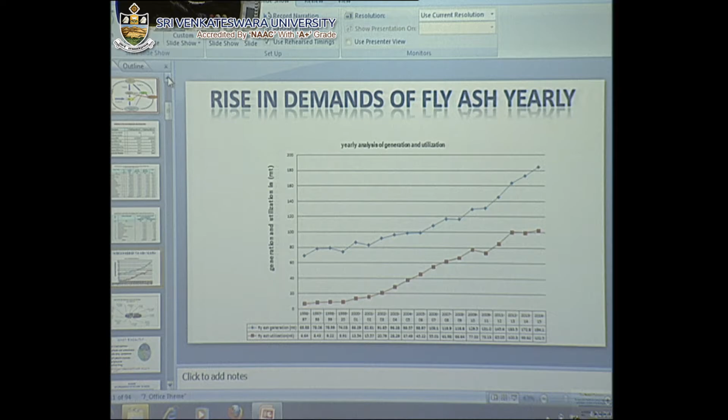Okay. So if you see, India is going to be more than 150 million tons per year, where China is second. If you see, the utilization is only nearly 40%. So this 60% unutilized fly ash is going into our environment, soil, health, and many more. So how can we turn this waste material into a useful material?

The challenge. The government has given a strategy, a fly ash mission, to fund different research projects. They have made a partnership with Russia also. Even so, India's fly ash utilization is very low, and still this has become a fly ash pond. Some fly ash, due to the rain, comes into the water, and again the soil is going to be destroyed.

So this is the major problem for the environment sector and agriculture. As well, if you see, the industry made a rule that near a thermal power plant, within 300 kilometers, you have to use the fly ash, because transportation of fly ash is a big problem. So to reduce the cost, it is made compulsory to have bricks made of fly ash, so that they can be used in construction. Roads also can use it, but still I can say we are far from the utilization of fly ash.

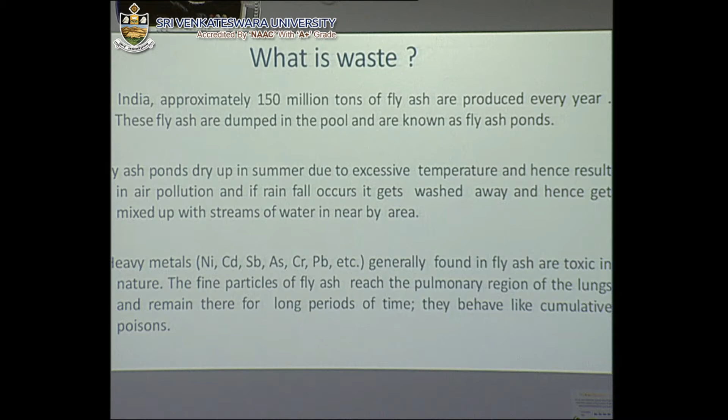So I am going to give a scope to the research scholars as well as the scientists on how we can mitigate or how we can use fly ash more and more, so that this fly ash waste material becomes a useful product for humankind.

How much time, madam? Okay. So okay. So this I am skipping.

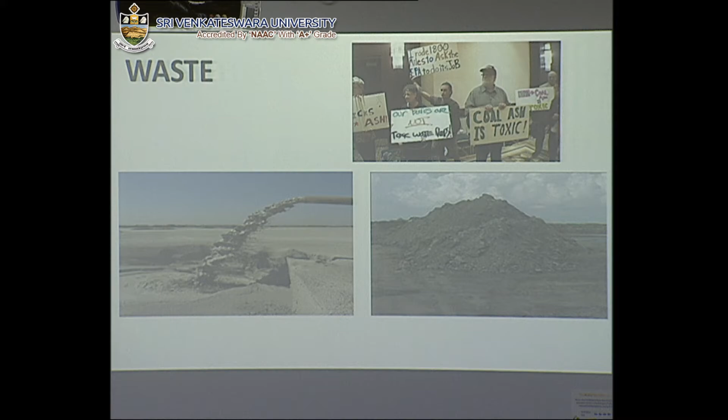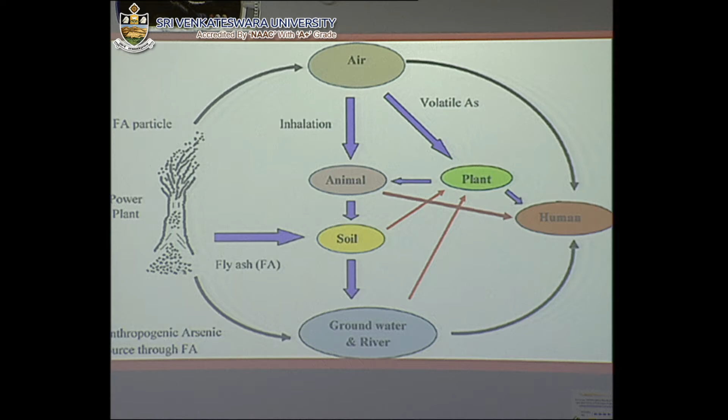No problem. So you see, this is basically the fly ash, we have the pond. I am going to skip those things. This is one summarized figure. So here we have the power plant. The fly ash particles come here and go into the air, and this is because of hazardous material like cadmium, all these particles. So this is going to be inhaled, and this is a problem for health.

Then also the animals, the soil, groundwater is going to be contaminated, soil is going to be contaminated, plants also, and overall this is going to affect humans. So this is the cycle of how it becomes unwanted. How can we use the material? Because we cannot stop the growth of India or the world by stopping power plants. If power plants are stopped, we cannot get energy. So we require energy from thermal plants.

At the same time, the coal quality. So we are getting more ash from the coal. So India is also importing coal from outside because it has less ash content, even though ash is a major part of Indian thermal plants. So if you see the generation, this is basically the data.

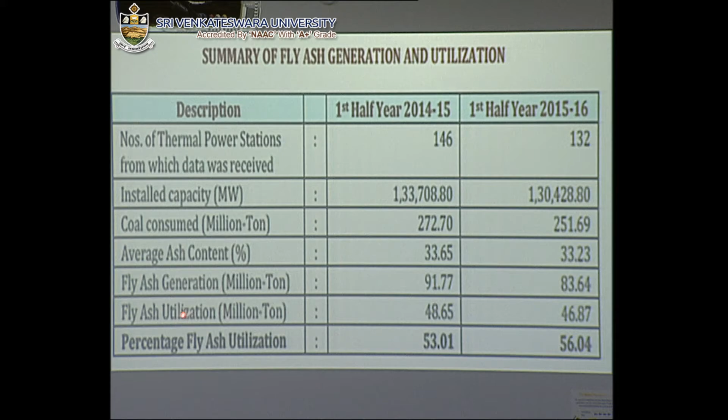Overall number of thermal power plants, 146 here, 132 here, and the coal consumption, you see, 272 here, 251 here, and fly ash utilization you see here 48.65, here 46.87, and overall the fly ash utilization is still 53% only.

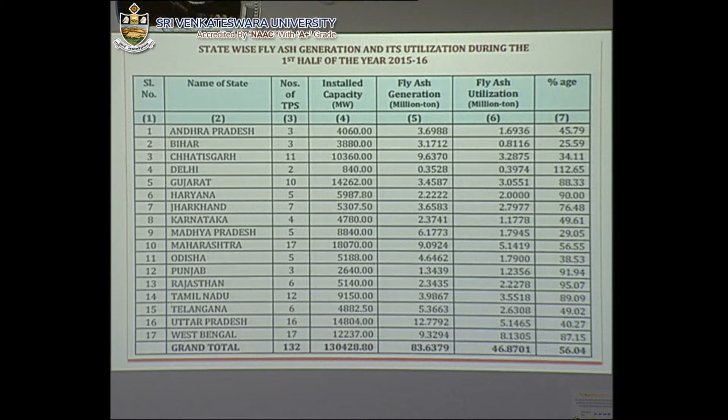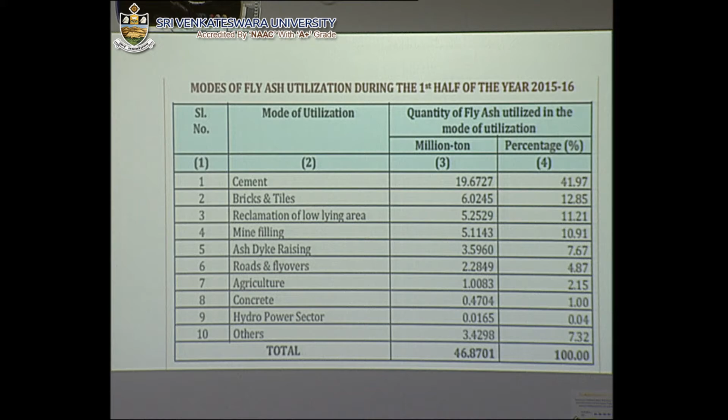The major utilization of this is in cement, brick and tiles, mine, ash dyke, roads, agriculture, concrete. But if you see, this utilization is insignificant, so we have to find a new kind of product. This shows how we are going to use this fly ash. This is basically the Central Electricity Authority data, published in 2016, and this clearly shows that we still have not fully utilized the fly ash.

So I am going to give you some glimpse of what we are working on with fly ash. Typically, use of fly ash in cement is nearly 44%. I am going to skip these things. If you see the data here, the generation is in blue color, and this is what we are utilizing. So we are far behind in the utilization of fly ash.

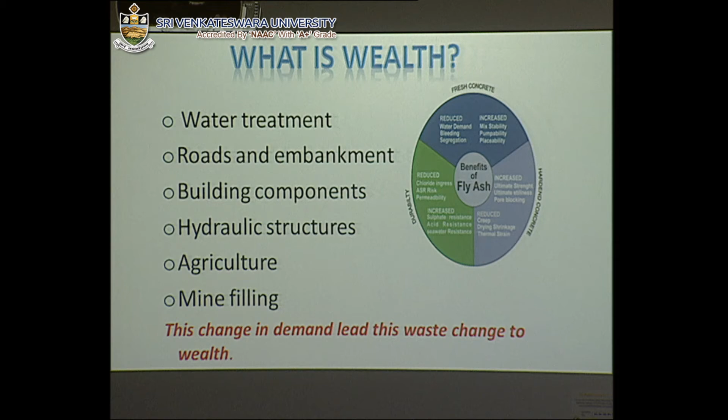So in this photograph you can see cement is 41.97% because we have construction, and in cement earlier we were using ordinary Portland cement; now they are putting in fly ash. So cement is the maximum utilization of fly ash, but still we are not able to cover 100%. So how can we use more and more fly ash?

I think the DST and other government departments are ready to pay for any product, tiles or any other things, if you can use the fly ash, because fly ash has no cost and plenty is available. Or how you can convert a fly ash pond to agriculture, because people are doing some research on agriculture, but agriculture is still a challenge. We are not able to grow food varieties. People have used it only for greenery purposes, but it is not coming as an agricultural product. So you can clearly see utilization is very less.

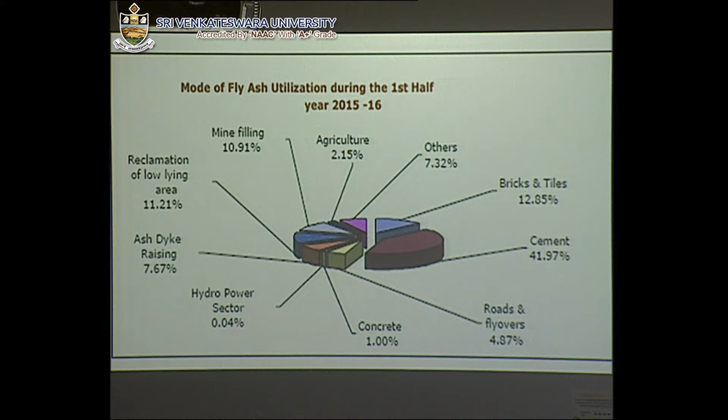So this is a challenge to our young scientists: how to use it with new concepts. We are going to discuss a few things I am working on, but still you can have a thought, and I can tell you very little work is happening in India, very little. For any work with a new idea, money is not a problem; the government will provide the money. So we have to figure out how to do it.

Some people have started using fly ash in water treatment, filtration, roads, building components, hydraulic structures, agriculture for greenery, and mine filling. So this waste material is being utilized, so we are calling it waste to wealth. I am going to give something now; I am skipping those things.

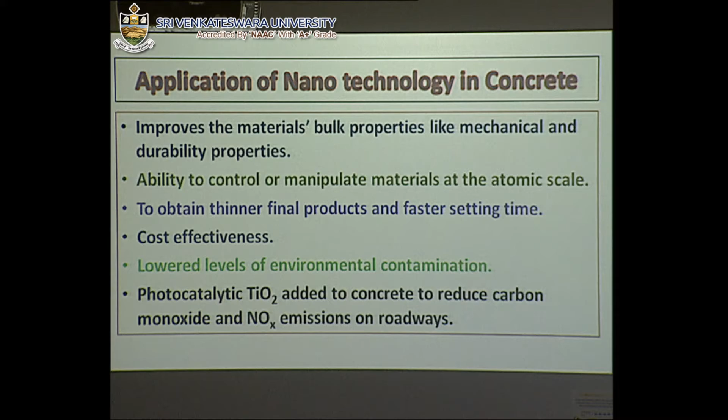So we have different applications of fly ash in concrete, and I have used nanoparticles to enhance the concrete. The fly ash cement available in the market has a strength of 40 MPa. We have used a new composition of cement, and now SEC is going to collaborate with us. We have developed nearly 100 MPa. This is a new composition of cement.

I have already filed a patent, but I am going to give you some hints about the new composition of cement. Now SEC is going to completely take over our technology. The same market available cement is only 40 MPa; we have 100 MPa, just by utilizing a very small amount of nanoparticles. I am not going to discuss this in detail; this is the high energy ball milling concept.

People are using different chemical methods to make nanoparticles, but what is the advantage here? There are two approaches to nanoparticles: one is the bottom-up approach, another is the top-down approach. This is a top-down approach. What is the advantage? Here there is extension of solid solubility. Suppose two things like oil and water are not miscible. If you have two systems which are not miscible, how can you make a new product?

In this system we can dope higher than in any chemical process, so we call it extension of solid solubility. Then we have amorphous, intermetallic, polycrystalline, nanocrystal, nanocomposite and disordering, alloying in immiscible systems. These are the variety of samples you can get by high energy ball milling. So a lot of people are using high energy ball milling.

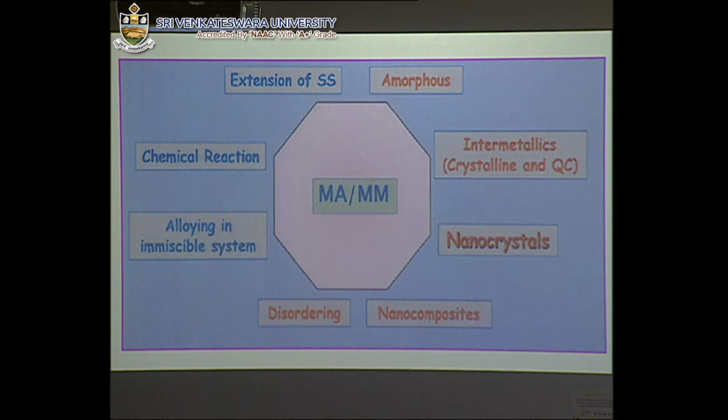The only thing is that contamination may come, but we have the understanding of how much we have to grind it so that you get a final particle. So these are some who are using high energy ball milling. It is a very simple technique. Anybody can do it; this does not require very much knowledge.

We have the materials, we have the required mass. This is half mv squared. So it depends on the mass. The velocity is 300 RPM. So whichever material has higher density, the impact energy transferred to the powder will be more. So half mv squared. So we are using the tungsten carbide ball. Its density is more than steel, and therefore the formation of nanoparticles is higher in the case of tungsten carbide.

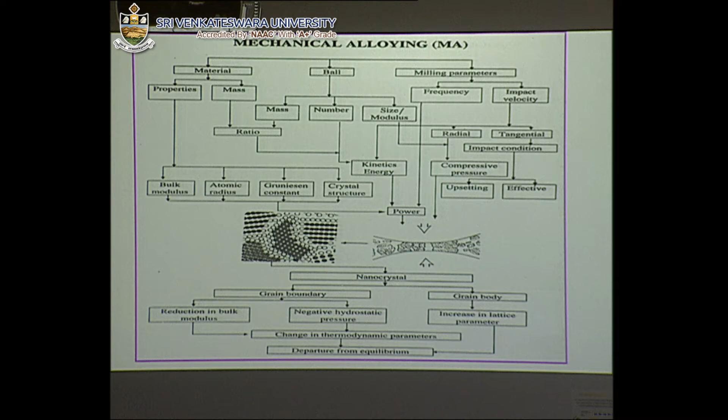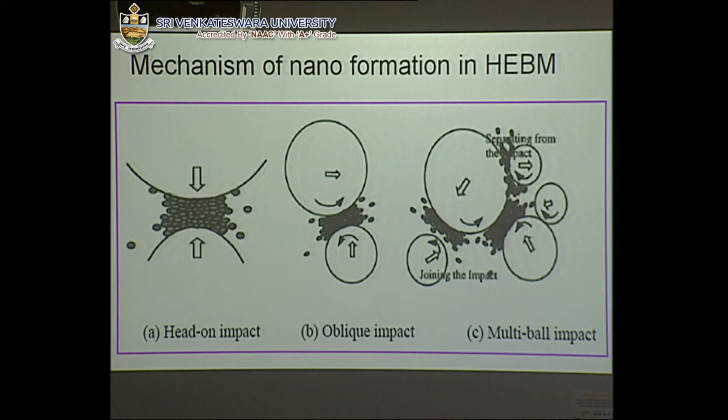People who are interested can discuss the high energy ball milling concept separately. So this is the mechanism of what is happening, the general mechanism, from Progress in Materials Science by Suryanarayana. The powder particles come between two balls, they get collided, and we get the different nanoparticles.

So now, in the concrete, what is happening: there are different kinds of pores, and due to this the strength of the concrete is affected. Pore distribution in the concrete is very important, and it will be very helpful if you control the pores. If you don't control the pores, you cannot control the strength of the concrete.

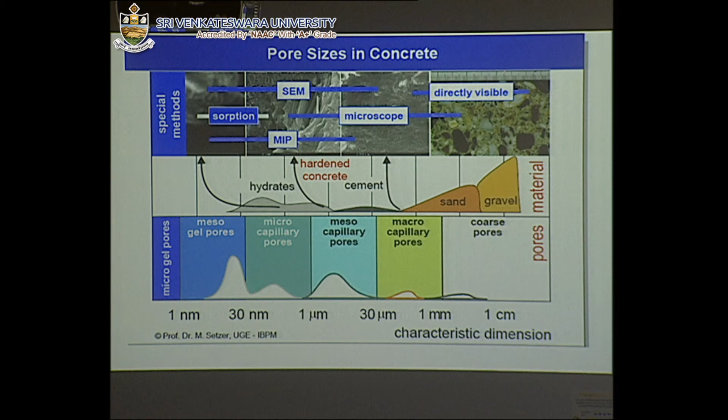So this is a very important technique for corrosion resistance as well as functional material properties, and people are using impedance spectroscopy as a very good tool to understand corrosion resistance and other relaxation and functional properties.

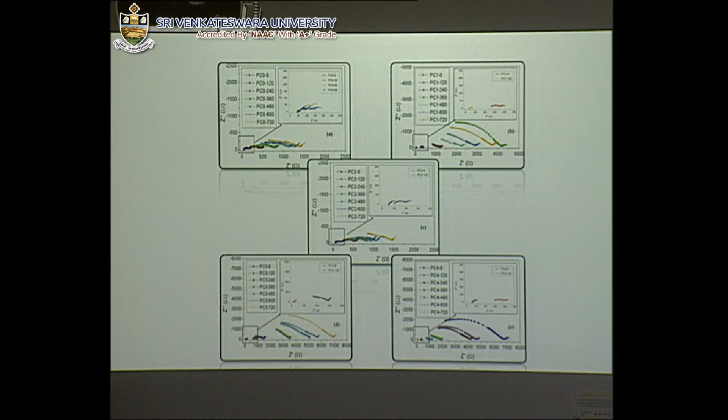So this is tested against the AS standard setting time. If the setting time increases, that means the pores decrease and strength increases. This is very well correlated. Because of lack of time, I am not going to explain. So some properties you can see here.

We have the nanoparticle, nano SiO2. What is happening in OPC, ordinary Portland cement? Here we have no fly ash. So what happens if you put in nano silica? In the case of OPC, we are getting a high 63.08 MPa compressive strength, whereas in PPC, fly ash of more than 10% is already given.

So in the fly ash, SiO2 is already available. If you are adding more SiO2, the calcium hydroxide which is available for the pozzolanic effect is not going to utilize it, and that is the reason adding nano silica is not useful in the case of PPC, and the strength is reduced. We have the different concentrations.

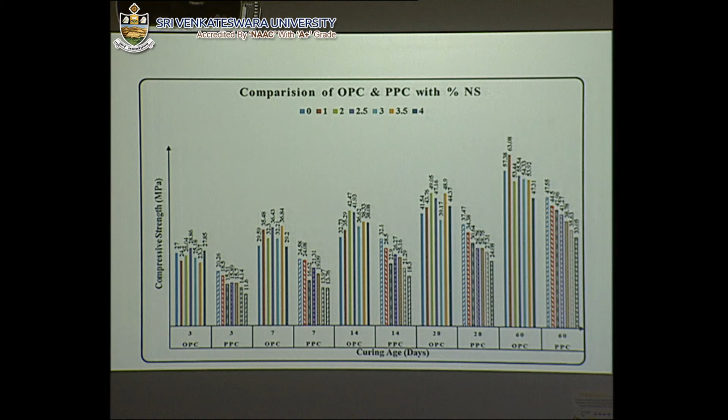With ordinary cement, if fly ash is not there and we put in nano silica, the strength is going to increase. This is the application of nano SiO2 I showed you. People are also using different particles with different concepts, but there is still a lot of scope for adding nanoparticles to increase strength. People are using carbon nanotubes and other things, but mixing these particles at a higher scale is still challenging.

This is another aspect, the chloride penetration depth. This is very important because the concrete has to be inside different corrosive environments, and this tells us how much it is going to penetrate or resist penetration. We did the chloride penetration test, and we found that in OPC, when we put in different percentages of nano SiO2, the chloride penetration is much less.

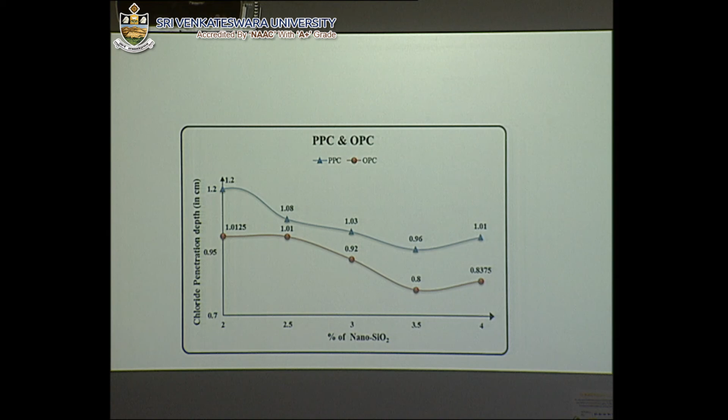Basically, there is a research gap—till date, research has been reported on the use of nano slag or fly ash. Slag also comes from plants where steel is produced. I have worked on fly ash, and I'm also discussing slag here. A detailed investigation of the fresh, mechanical, and durability properties of concrete containing nano fly ash and slag is needed. Hence, the present investigation attempts to bridge this knowledge gap by using nano fly ash and nano slag along with bulk fly ash and slag in concrete.

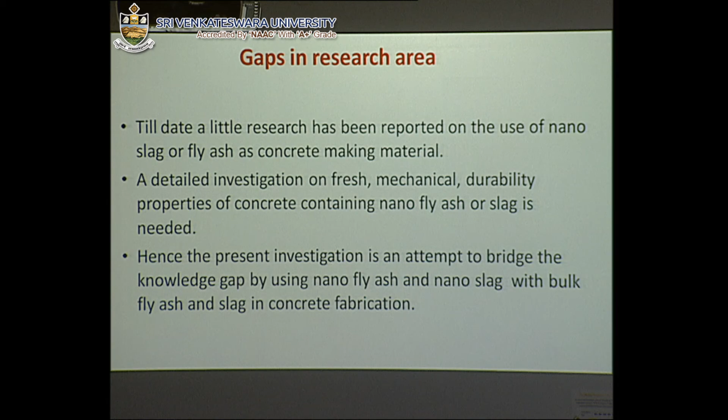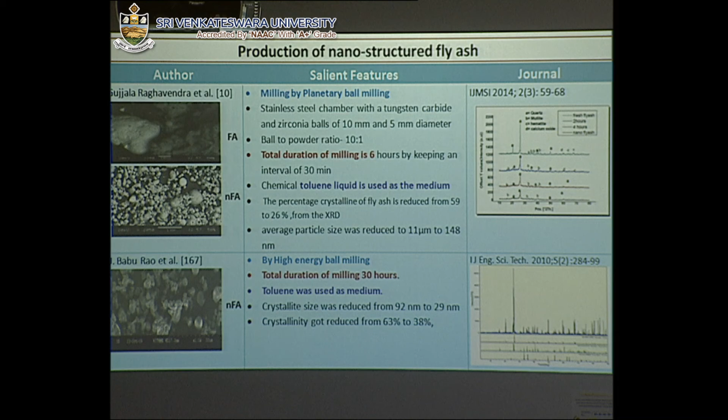Many people have done ball milling for 30 hours, as seen in the literature. For carbon nanotubes, people have used them for mechanical crack prevention. Titanium dioxide has been used to increase the degree of hydration. Silicon dioxide has been used, and zinc oxide has improved processing time. Al2O3 nanoparticles have improved split tensile and flexural strength. Nano calcium carbonate is used for accelerating hydration rate, and nano fly ash also improves compressive strength.

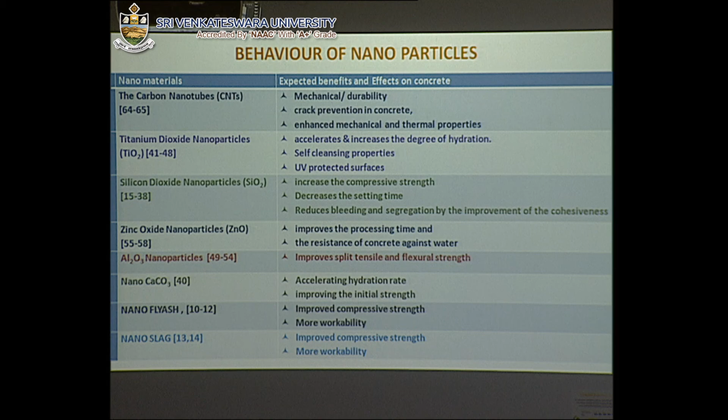So these are the nanoparticle applications in fly ash. People are also using aluminum Al2O3 for our rooms, using air conditioning concepts. If you can use some kind of nanoparticle on the concrete, outside or inside, to reduce the temperature by 5 degrees, this could reduce the need for AC. So this is another problem I am giving you—how we can reduce temperature by using some nanoparticle in the concrete. Thank you, since the time given has already been used.

So I can keep those things in mind. There are a lot of things, a lot many things, yeah. Because for a lecture, you need at least 45 minutes to 1 hour, so I'm skipping through and diving through this quickly.

In terms of concrete, we see higher ultimate strength, increased durability, improved workability, and reduced bleeding—these are the concrete installation benefits. Then they have used fly ash bricks, but people are still facing pollution issues. This is another problem; people have not used this much.

They are also using crude oil, and they are finding some rare earth elements. We had a meeting with Dr. T.S. Kumar, and now they are thinking about how we can extract rare earth elements from fly ash. Even at 1%, rare earth extraction is very difficult. So this is another problem—finding rare earth elements from fly ash. This is one of the good problems in fly ash research.